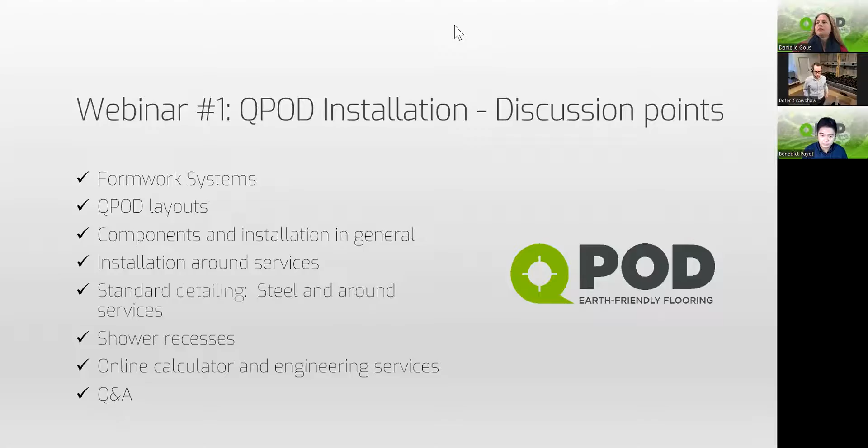Good. So moving straight into Formwork Systems. Behind me here, I've just got a demonstration for mock-up purposes only of standard boxing at 300 millimeters. I also want to share with you the QuickSet formwork here, which I've got a demonstration of. This is the insulated formwork system, an internally braced formwork system.

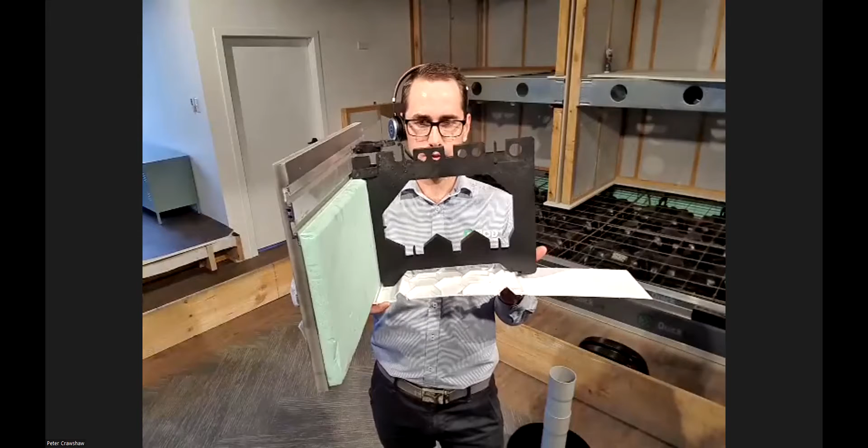So there's a really revolutionary new product that we're working on with QuickSet, which we're going to touch on more in our webinar later this morning. So if you haven't registered for the QuickSet webinar at 10:30, make sure you jump in on that one too.

So jumping straight into layouts now, Danielle, if you want to just share with the folks what we do for layout. So here on the screen, this is what we do for every job that's specified with QPOD. We'll do a QPOD layout of all the components and where they fit on the configuration. So if you've got ins and outs in your slab, if you've got angles, thickenings, we'll do that whole layout according to the design of your foundation. So it gives you down the right hand side there all the components, quantities required for the job. That's a really handy thing - installers, when installing QPOD, can just follow that to a T and everything fits into place.

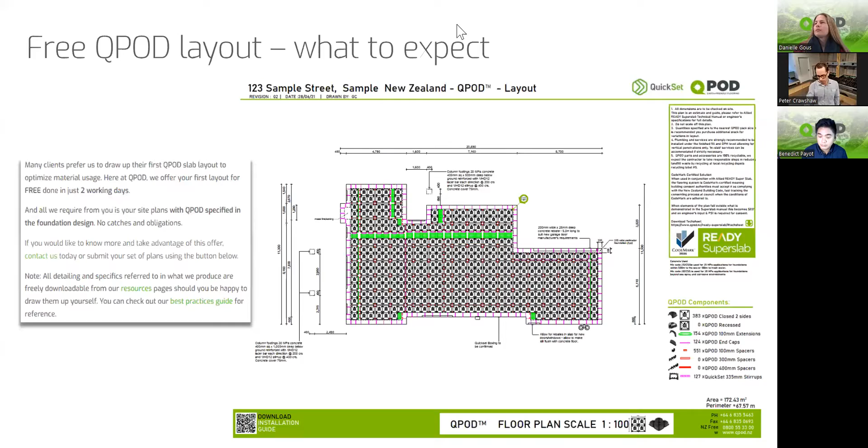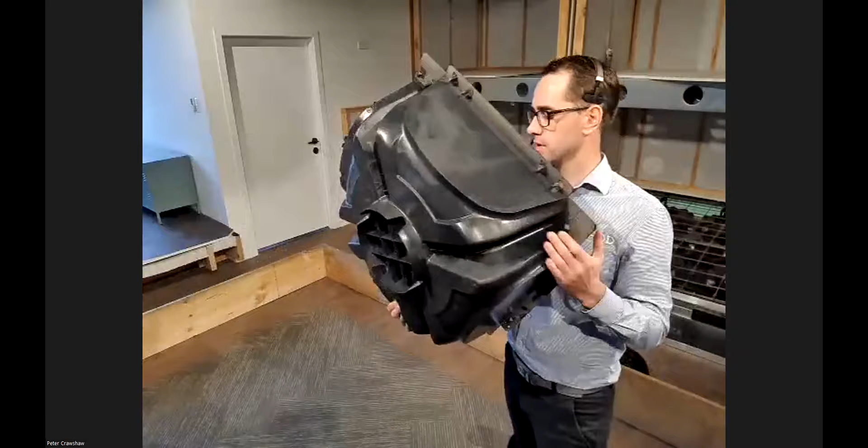Components in general - next slide there, Danielle. We've got the QPOD components, the standard QPOD components, starting with the standard QPOD. This is a closed-sided QPOD, so with 4 of these joined together, that makes one full pod at 1100 by 1100. On the screen you can see that pod on the left-hand side - that's a single pod. We supply them as a group of 4, which makes up your 1100 by 1100 equivalent pod. Moving across, we've got the QPOD open 4 sides.

It's a pod for continuous configuration as opposed to a raft configuration. The open 4 sides is used when we don't have any ribs in the foundation, so that's good for 200 kPa ground upwards, basically good ground situations. The raft is better suited for obviously TC1 and upwards, TC2.

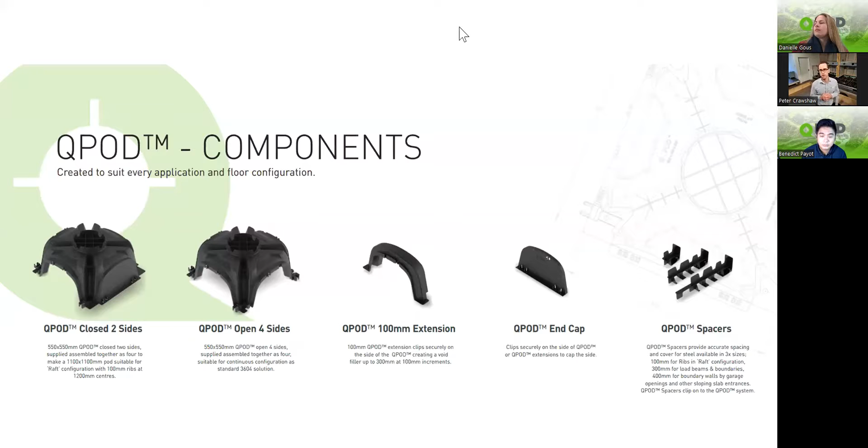Moving across on those, the other parts here, we've got the 100mm extension - that's a module that clips onto the pod to create your 100mm adjustments. And then you've got caps to cap off the voids where you break apart a group of 4. On the far right, we've got the QPOD spacers, 100mm, 300 and 400, for the various foundation configurations. The next slide will show us the 4 QPODs joined together, how they make up the 1100 by 1100 raft. Danielle, if you could share that.

So there it is. That's how they come supplied, as a group of 4, all stacked on a pallet. You'll get 50 square meters of product on one pallet because of that stackability.

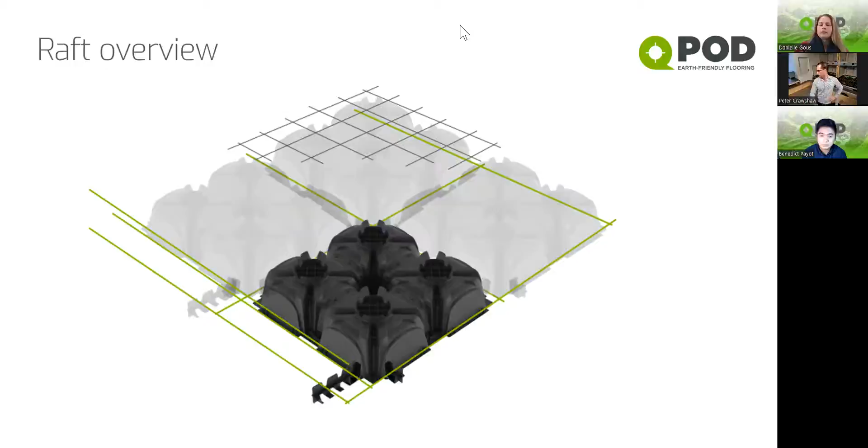Builders are simply picking up a group of 4 and putting them down. Those familiar with QPOD would be aware of the ease of installation on site and the minimal footprint we have there. I'm going to share a physical demonstration now of how to put in the pods. That's what this webinar was all about.

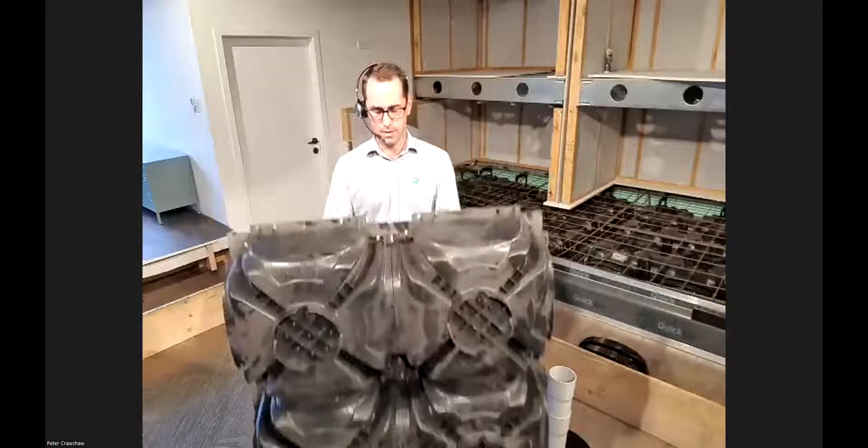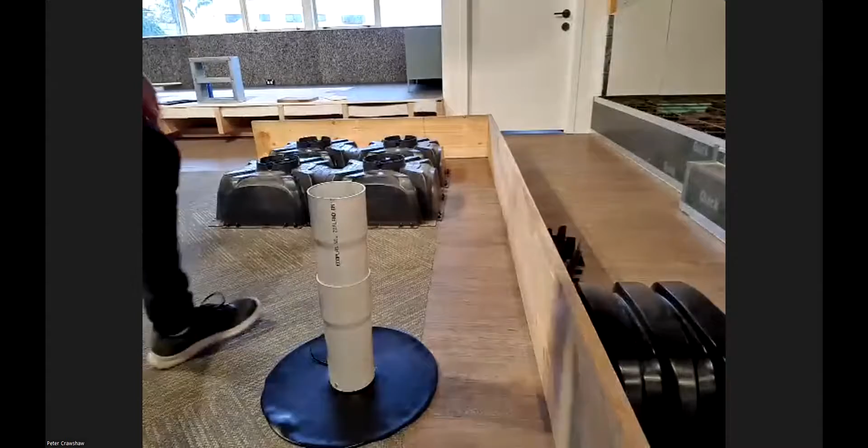Here I've got a group of 4 pods, and I'm going to pop that down in place in the corner here. If I shift my camera for you, you'll see how that works in real life. We go ahead and put these spacers in the perimeter, and that just butts up against your perimeter boxing.

You've then got the 100mm spacers for the ribs. They just clip in place on the pod, 2 per pod, and then you bring the next pod in to meet them neatly, so that just butts up against those 100mm spacers. Your steel then goes down in those ribs.

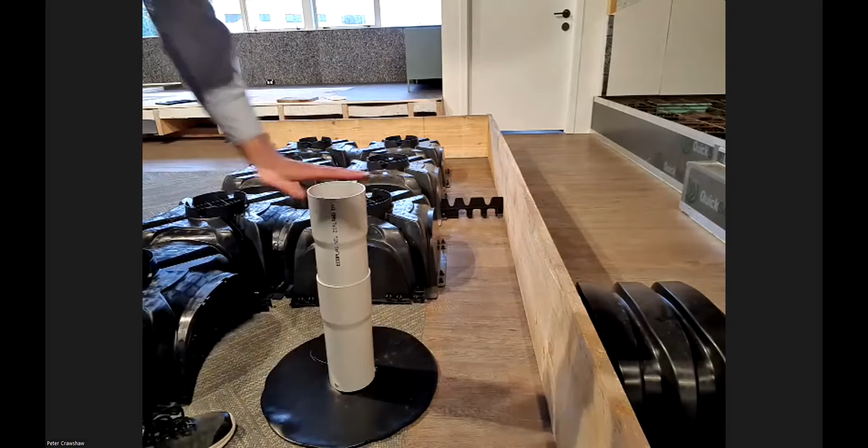You can see my mock-up here of a pipe penetration. I'll touch on that shortly, or we can touch on it right now. So when you've got a pipe penetration in a slab, you're simply breaking off a pod. You can see I've pulled one pod off here.

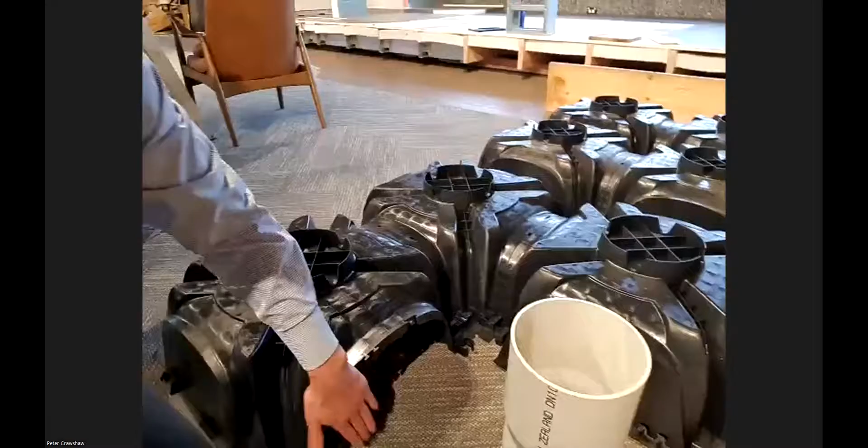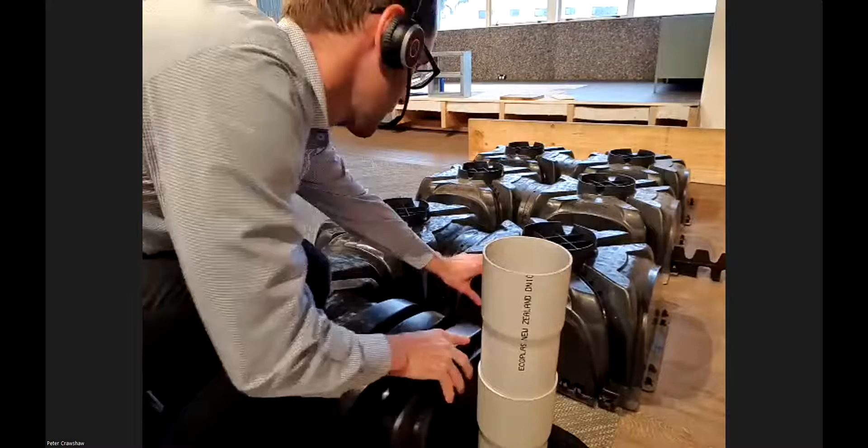Then you're closing that open side off with a cap. So this little bit of void here, we go ahead and use those 100mm extensions and clip them into place. That gives you your adjustment out to the surface penetration, and that also is capped off by a cap there. Hope you can see that on the camera - get a different angle, you can see what's going on there.

So that's a basic configuration. I'll just show you what we did in the rib there. You can see these rib spacers, they just clip onto the pods and your steel sits down in those saddles. So those clip on around the perimeter, making it a real positive fit to the perimeter boxing.

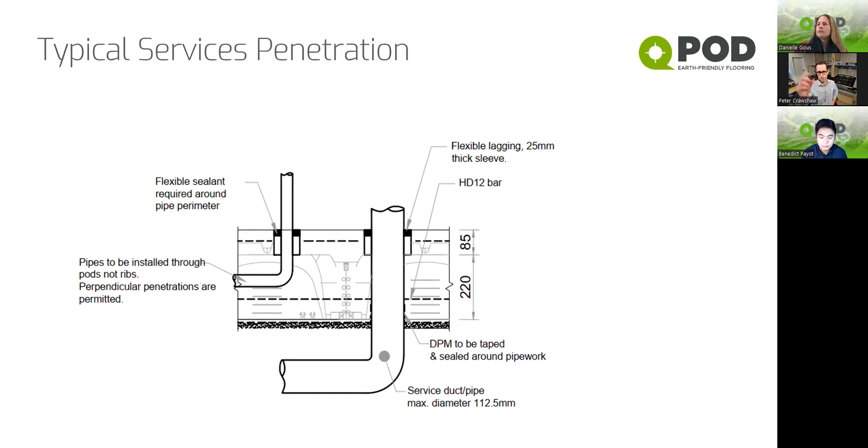If you want to bring up on the screen there, Danielle, just how that looks practically on a detail - this is pipe penetrations. Effectively you can bring the pipes in through the pods, or obviously up through the gravel underneath, and create that penetration in the pod.

The next slide there just shows it in a plan type view, how that steel runs through. So basically where your penetration's coming up to the perimeter, you're creating that continuity of the steel around the pipe. You can see the extensions placed in there, coming up to the pipe to fill that void.

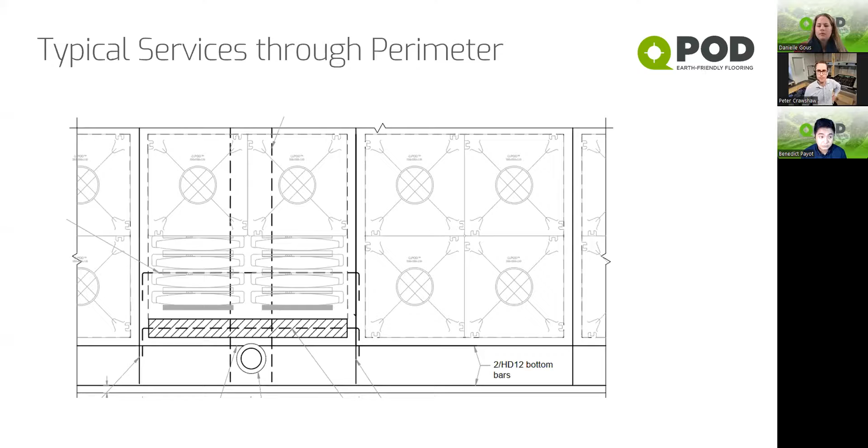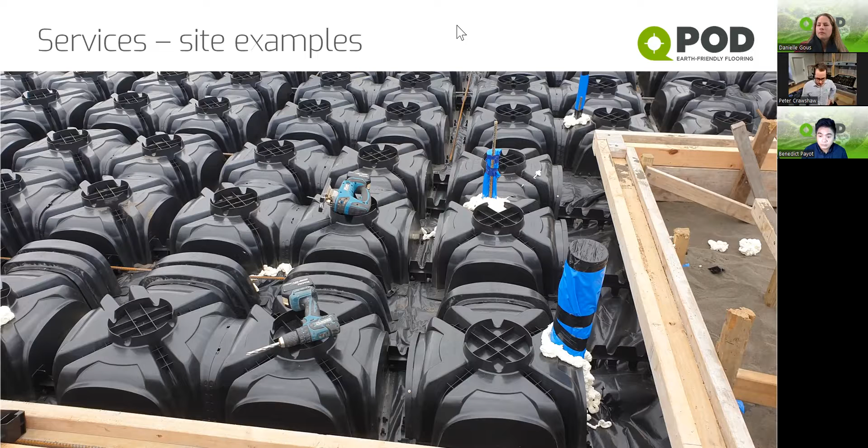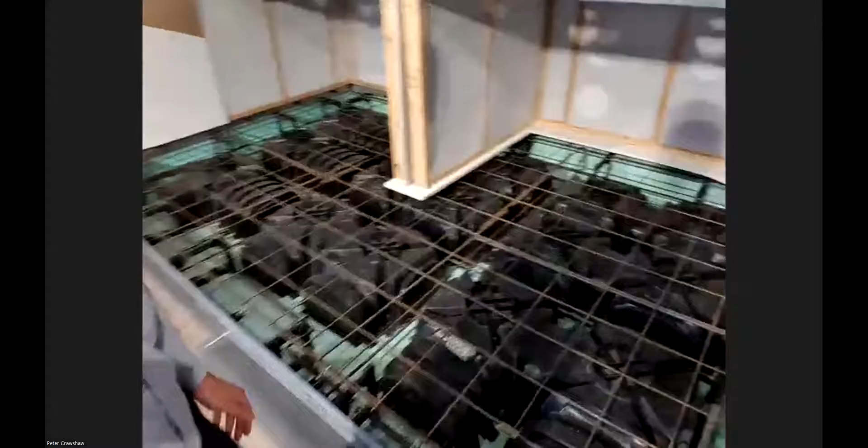Like I said, it's a great opportunity to come in here and see this actually installed. Better still, when we've got a QPOD site, we can invite you along and share that with you. So sharing your screen again there, Danielle.

So here's the standard detailing. You've got the 3 perimeter D12s, the one in the rib, and then you've got the mesh on top. At each rib termination, we've got a hockey stick bar noted there coming in with a bend on it, coming down into that perimeter footing.

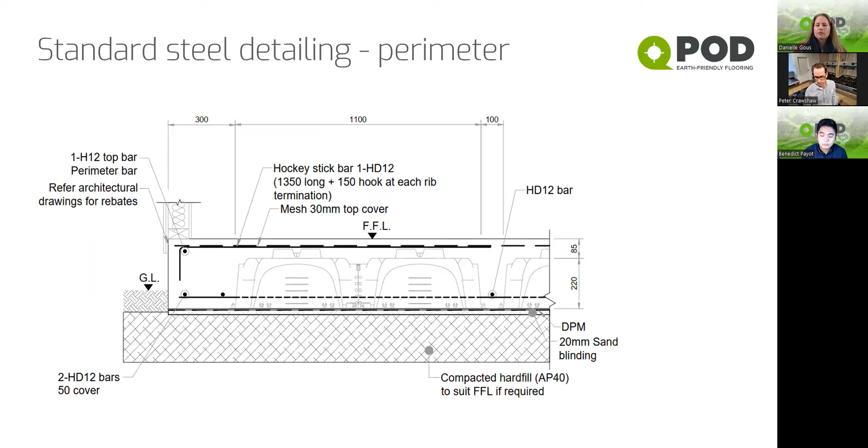So that's a standard perimeter detailing and rib detailing. The next slide shows us a thickening, Danielle. That's got 2 D12s down in the foot there, and the mesh going across the top. So that's your standard detailing for thickenings.

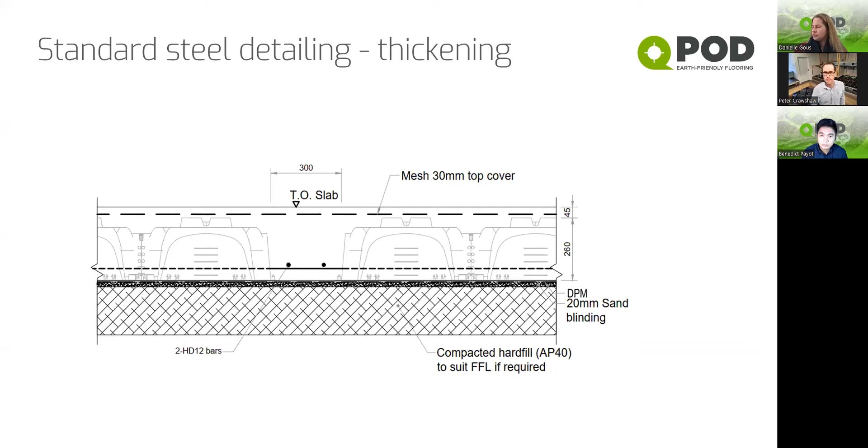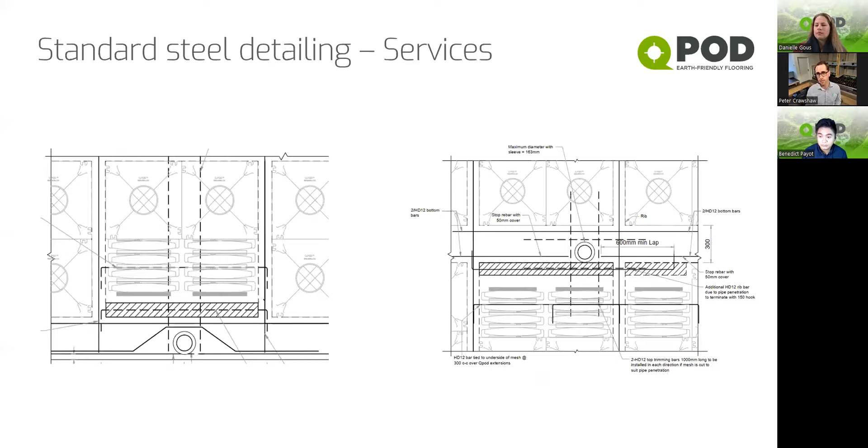Around services, as we shared earlier, there's an example of the perimeter detailing. So once again, you're creating that continuity of the steel through the thickening or the rib. On the right there, you've got a load wall thickening through the base, and a service coming through that. Much the same as what you're familiar with in other raft systems, you're just creating that rib continuity through the ribs.

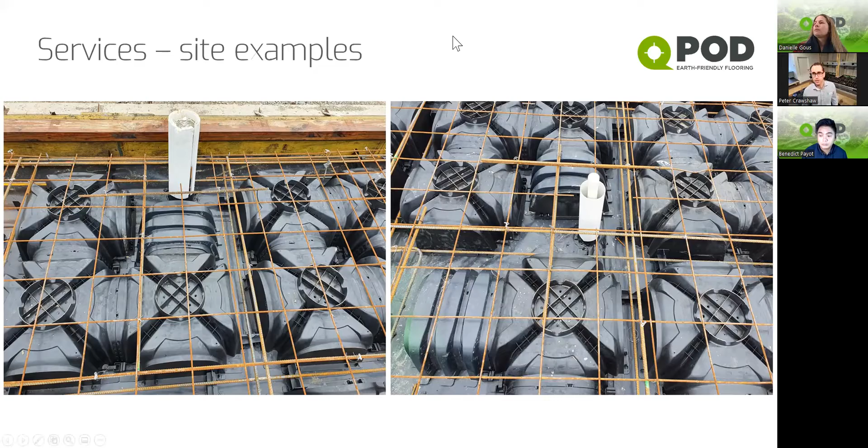We do supply a recess shower pod from the factory, which we cut down 60 millimeters and supply them as per the site layout that we shared earlier. So that means your mesh sits 60 mil lower, and then you create that lap of 300 millimeters at the perimeter of that recess.

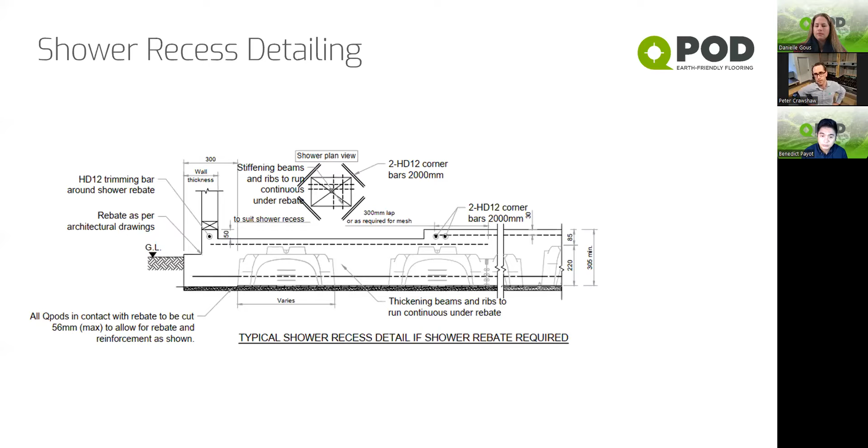So the pods are recessed for the entire distance of the shower and the 300 millimeters beyond, and then to the very next available rib, really, for practicality. So the next picture will show it in real life.

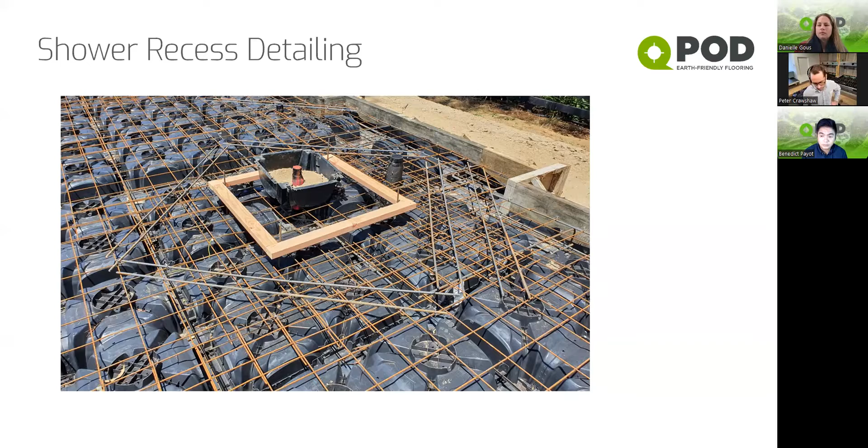Thank you, Danielle. So that pretty much sums up the main factors and features around QPOD and the installation.

If I could just mention, you might want to share on the screen the online calculator I mentioned earlier. We do have a material usage calculator on the website, and here you can put in your meters squared and lineal meters and thickenings and other details specific to your slab, and it will give you pretty much the steel you require based on standard detailing for your slab.

You can also adjust that. So if you've got 2, by default, it'll pick one steel bar for the rib, but obviously you can adjust that to 2, and it'll give you your total steel required.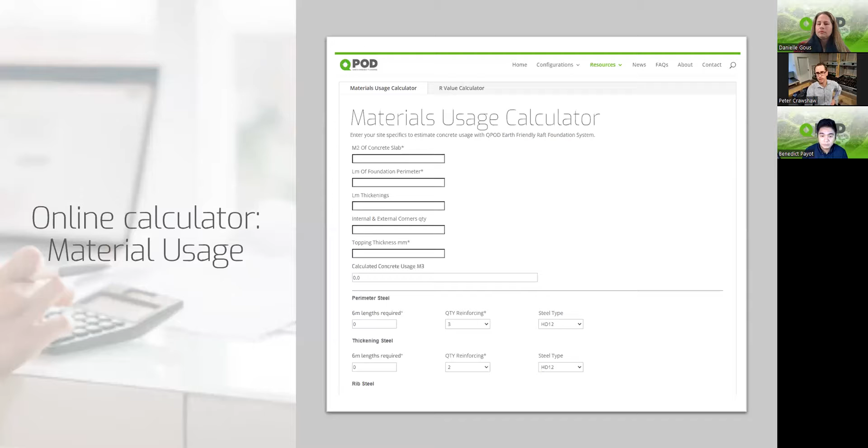Now contractors are finding this very accurate. It's a great check to make sure you've got the right materials for your job. It's not specific for every job. It does pay to check the engineered design or code mark design that you've got, slab design, and just check the detailing and do your own summary.

Secondly, we've got the R value calculator, which is really becoming of interest of late with the H1 changes, which we're going to talk about shortly in the next webinar. But in here, you can put in your meters squared, your lineal meters, and it will give you an area to perimeter ratio. And then it will give you your R values achieved with different insulated formwork systems.

So further down on the calculator, there is a bunch of options with the QuickSet system, and which QuickSet system you require for your zone to specify on your job. So it's a really handy thing that gives you your R values.

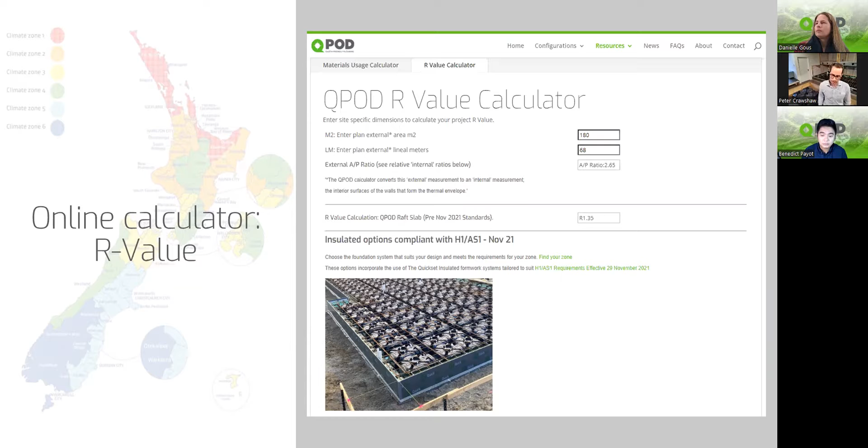Yeah, so just mentioning there, the detailing I've shared today is based off the code marked Ready Super Slab detailing. So Allied Concrete have included QPOD and now recently QuickSet as standard systems in their code marked slab system.

So you can actually follow this manual, and if your house design fits within this manual's parameters, such as ground conditions, house size, shape, loadings, etc., you as an architect can design the foundation yourself without engaging an engineer. Further to that, when it goes beyond code mark, it obviously requires engineering.

We do also offer an engineering service here at QPOD now. So along with the QPOD plan layouts, as you can see on the left there, which we do for free for any QPOD specified plans, we now also offer an engineering service. So if your geotech says you need an SED design, whether it be TC1, TC2, if it's expansive ground, liquefiable ground, call us. We've got a super speedy system now in processing these engineered plans, which we've teamed up with a group of engineers around New Zealand who work with us to complete these designs.

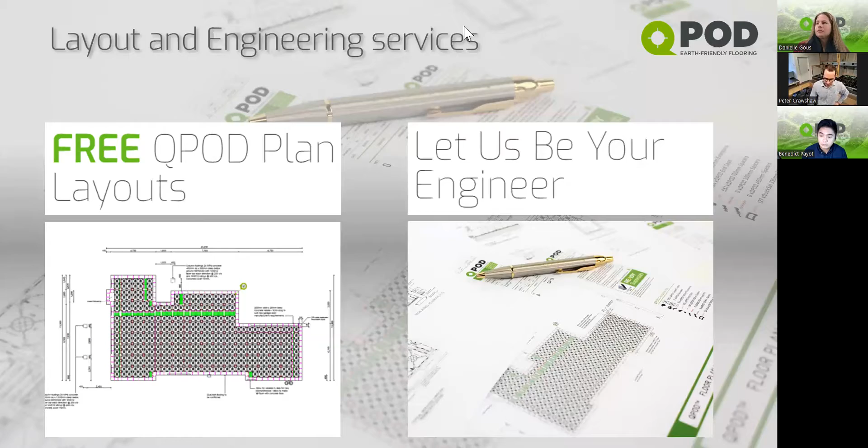So thank you all for listening in today. That's me wrapping up really. Hopefully there's something there in that installation that helped or inspired, and some of those services at the end.

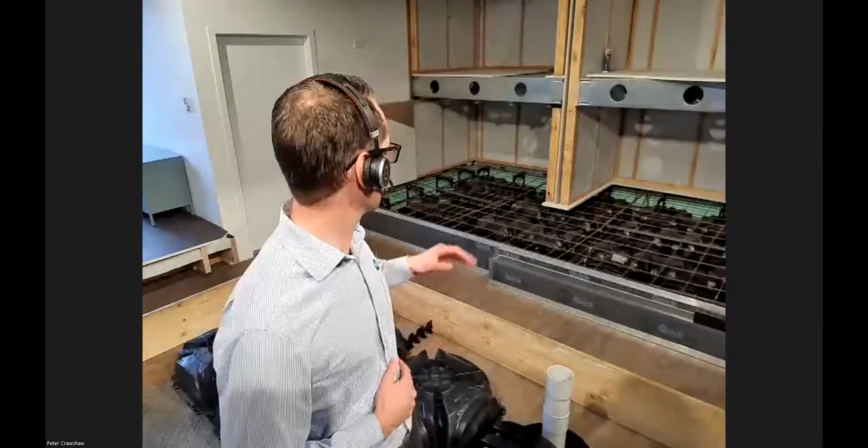If you can see the display behind me, it's got mesh on it. Essentially the hydronic heating sits on top of the mesh, and you use a wire tie gun or cable ties and tie it down to that mesh, and it just goes on top of the mesh. You allow a bit more topping, say 110 mil topping instead of 85 mil topping, which allows for the extra concrete to cover your saw cuts. As for types, hydronic heating is by far the main one used, but certainly electric systems are available too.

There was a follow-up question on the chat, but let's answer the one that came first: do you have any issues with QPODs lifting during the pour? Great question. When I demonstrated the little rib spacers, which I'm showing here on the screen, they clip onto the pod, and then when your steel comes down, that steel really pins down the pod. So no, we don't have any issues with pods lifting up during the pour, so long as those rib spacers are put in, which you need for the steel in any case—that really pins down the whole pod system, which is pretty unique.

And then I saw a follow-up question come in about the saw cuts. Yes, same as usual, maximum of 6 meters apart, and obviously trying to focus them around re-entrant corners and likely crack-inducing places.